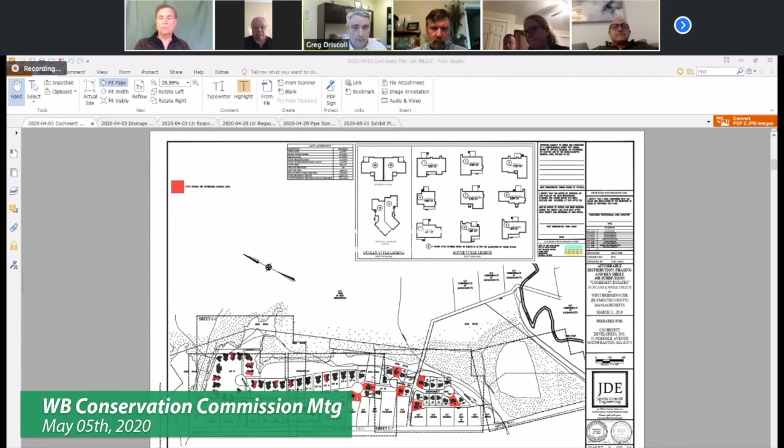I have. Yes, why don't you do that? Show the main plan, latest one. Oh, it looks like screen sharing is disabled, unfortunately. Okay, hold on for a second.

A few of the things that we had done was perform some soil testing along this area, back behind these houses on Scotland Street, actually behind all the houses on Scotland Street, because we did the other end as well, through here, and then also through here. So we got groundwater information on that, which confirmed and helped us revise the swales that go along the back of between the proposed homes and the existing homes, which is going to bring water into this basin over here.

That'll be a wet basin. So that's all designed per stormwater management, and everything checks out. This basin over here is also going to be a wet basin, so that'll provide treatment to the stormwater before it leaves the site, and also attenuate the flow. This basin out here is one that we introduced into the design to hit the groundwater infiltration requirement of stormwater management.

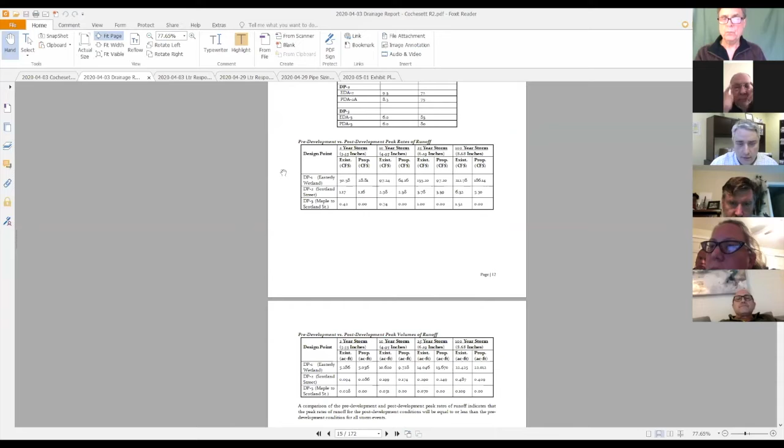This is the stormwater report, and what it really comes down to is these two tables right here. You can see from the 2-year storm, 10-year storm, 25 and 100-year storms, the peak rates of flow coming out of this project are reduced quite a bit. We're also reducing the volume of stormwater that comes off the site. That'll help with the flooding and other issues known to be a problem in this part of town. So I think that's about it.

All right, it's all yours, Tim.

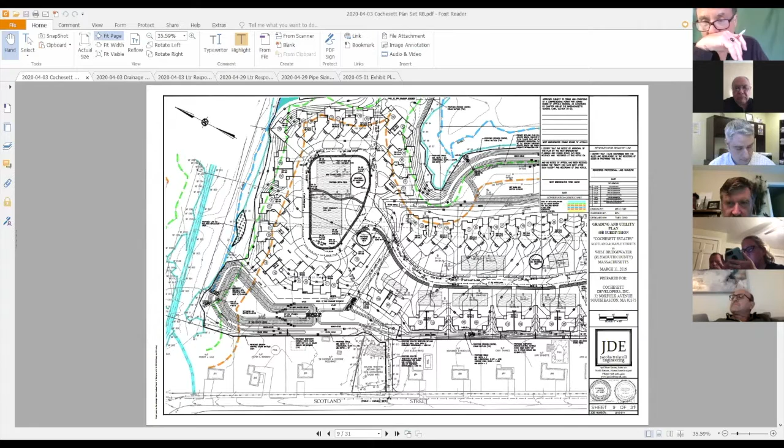Before I open it up for other questions, the compensatory storage area proposed for the replacement of having to go into the floodplain, that's all within the same flooded area, John? Yes, it appears to be.

I don't know if you can see my cursor, Greg? No, okay. On the plan you're sharing right now, the turquoise areas, yep, here, they don't appear to have any proposed grading changes. So how has that become a compensatory storage area?

Okay, that was a comment we received from the review engineer. This is what I'm calling the exhibit plan. We're hoping to catch these types of comments on a final plan set as a condition of approval, if the commission accepts that request.

So what we're showing here is a grade line right here at 62.3. That is the flood elevation, and we're showing callouts for the work to be done: grade this area down to elevation 62.3. Same in here. And this is a 62.3 contour just to connect it, because this right here is the floodplain line, 62.3 elevation. That blue dash line continues.

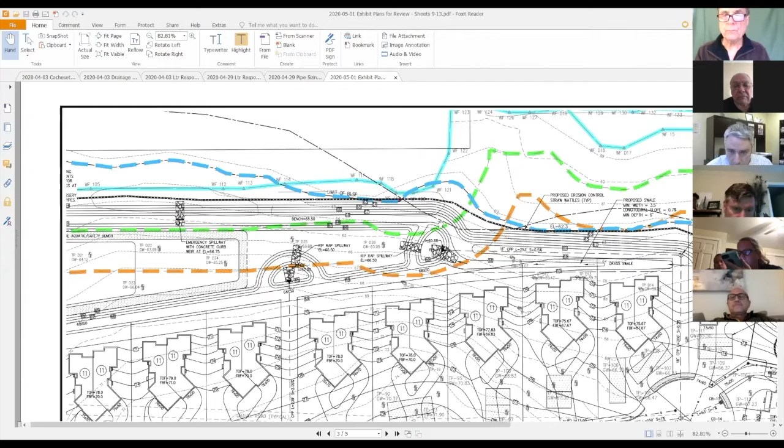So we grade that back to this area, and that back to that area, and other various places on the site that will provide the storage. We're getting more storage through here — it's a darker color. The way we're presenting that is the 62 elevation is coming back from this portion and being graded and dug out back to here, and then there's a little bit more 62.3 volume right behind it.

Okay, any of the other commissioners have any questions?

This is Mo, I have a couple of questions. One, just from a visual perspective, if I'm standing in the backyard of these abutters and looking at this project, I had a little difficulty determining what the average elevation change is between their backyards and the homes. It didn't look like much. Was that clear? Yeah, of the actual grading. Yeah.

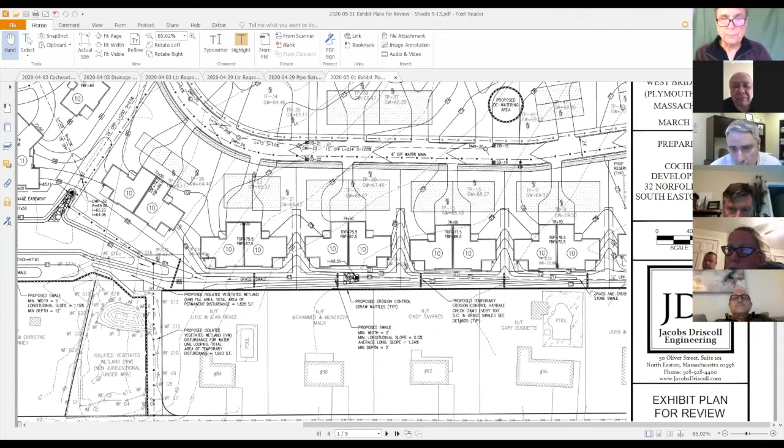So the proposed houses are coming up a bit because we want to keep the basements above the groundwater. Right here we have an elevation of 71, and this is coming up to 74.5, so it's about 3 feet right there. This is a 72 contour here, and it's coming up to 76. So it does have to come up a bit through here in order to keep the proposed houses above groundwater.

Okay. My next question — go ahead. Were you finished? Yeah, I was finished. If you don't mind, Mo, could I just have him expand a bit on your question? Sure. Greg, go back to that close-up of those houses that you just showed.

So by my scaling, these dwelling units indicated by the number 10 are 20 feet away from the back lot line, and everything behind the house is part of the swale, so there's really no backyard for these people at all. Is that correct? That's correct. And the swale is a drainage easement, so it can't be altered. Yep, is that correct? All right.

And then the swales in between those dwelling units with the number 10 designation, that's a drainage easement as well, is that correct? Yeah, right here. That was a request from the review engineer. All right, and along that swale is where I witnessed the perc tests, or test pits, to determine where the water tables were. For the most part, the bottom of the swale is either at the water table or just a little bit above, I'm sorry.

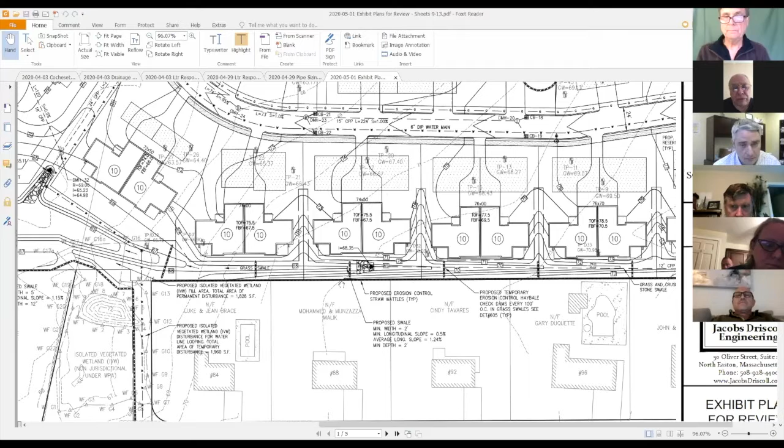Yes. If you would slide further north and do the same thing on that property, for the abutters there, take a look at the swale depth and the average elevation, that type of thing. All right, so we have a 66 through here, and it's getting raised up. It's pretty close through here, but then it goes up a little bit towards the back of these units, keeping them higher above groundwater and the basements.

This is probably the 67 contour through here. Yeah, it connects in right there. So across the swale is pretty close, pretty level. It looks like the top of the bench is about 67, 67 and a half—67.6 actually. So it's pretty flat through here, and then you'll see these houses further out.

And will the backyards be sloping to the swale? Yeah, these backyards currently naturally slope pretty much in this direction, so we'll pick up the water from their properties as it comes onto ours and direct it. From here down, we're directing it around our basin because we can't get it into the basin. It directs around and into the resource area through here.

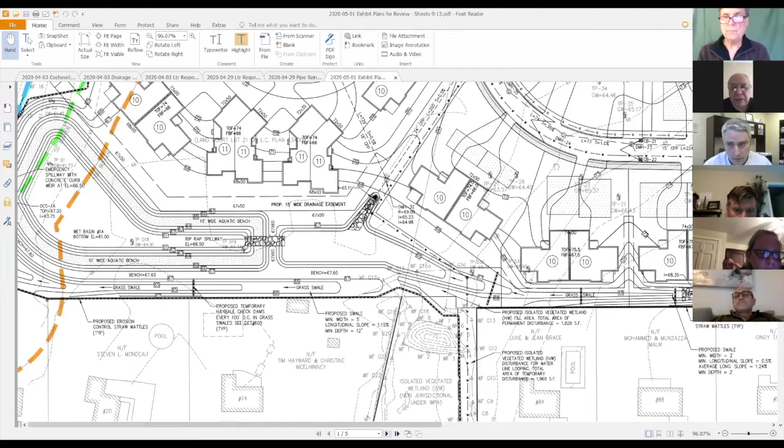And my last question, just for the public: the 53G engineer that we hired is an independent engineer to review these plans, and he concurred with your calculations. Is that right? Correct. Okay, that's all I had.

Do you want me to ask my questions? Yep, I was gonna say, John, what have you got? All right, I just want to see if we have any new people that I haven't let come in yet. Doesn't seem like anybody else wants to come in, so I think we're still good.

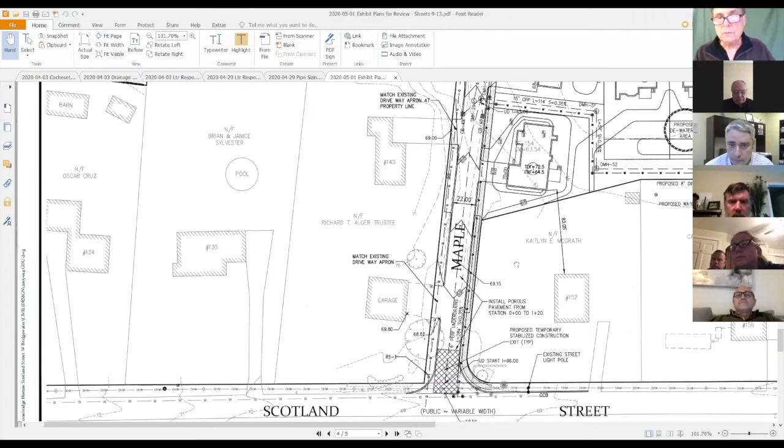All right, so the questions I have: on Maple Street, some of the abutters have asked about the alignment of the road and the width of the road. Yes, they did. So can you explain what is happening with a typical cross-section anywhere along that first part of Maple Street?

Sure. I believe it was Mrs. Pope, who lives at 140, that had asked us to narrow this road down on this side of the street. So that's why this is 22 feet wide right here, as opposed to 24 for the rest of the areas—we took 2 feet of pavement away from their side of the road.

What's occurring on the right-hand side of the road? Right through here, we have a sidewalk being installed. And we are putting in a section of pervious pavement right through here.

I don't know if it's not showing up, but from the high point of 69.15, down to here—that's the call out right here: install porous pavement section from these two stations, from 0 to 120 feet in. So the purpose of the pervious pavement is so that all the runoff from the high point heading out to where it connects into Scotland Street will be absorbed into the pavement, into the ground, picked up by this perforated under-drainage, and into the drainage system, and into this pond.

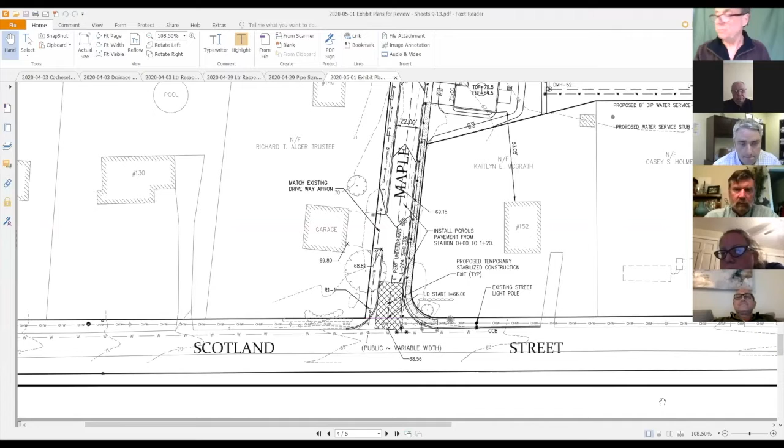Because the Conservation Commission owns the land to the east of this project, and Maple Street is an ancient public way on record, I think we would definitely want to clarify any and all claims against the use of that for the general public to access the conservation land. We're going to need an access easement and a right to travel over Maple Street to the boundary line of the conservation land, which is town land. Hopefully your client won't see any issue with that, but it's important to put to sleep any legal question that could come up, based on the fact that it could be an ancient road that's been prohibited from being used over a period of time, so the loss of access or whatever legal ramifications, we want to make sure that's put to bed right away.

I think Bishop. Okay, how do I take care of that? Let me find them.

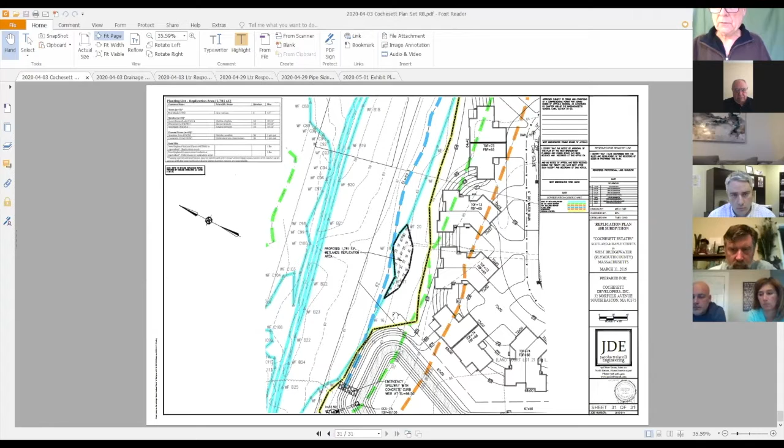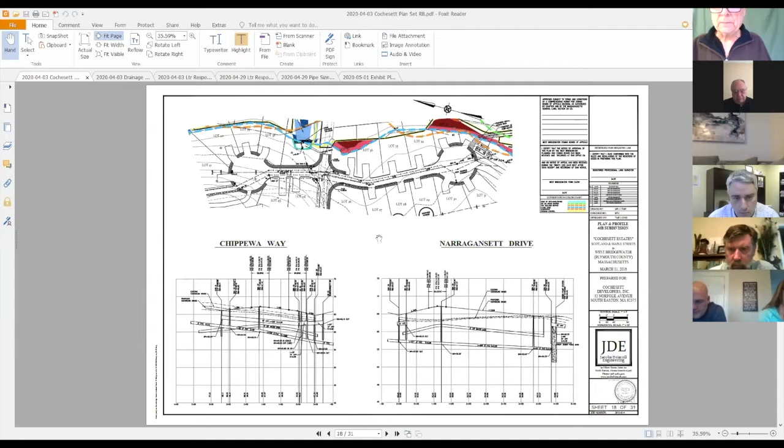On the plans, you had a security gate detail. Where is that located? I couldn't find the actual placement on the plans. Yeah, you just went by it on the detail. Perhaps the next sheet, there it is, up at the upper right-hand corner. Yeah, I'm not sure where that's supposed to be on the plan set.

So that's something that we need to look into. I'm wondering, I know there's a path over here, I don't know if that was where we're supposed to put it. But it's certainly not meant to close off Maple Street if that's any of the concern. Oh, I know what it is, this access road right here, this paved access road, I think it was meant for that.

Now, Bishop, is that something we want to keep gated off, or is that going to be free flow access? That was initially requested, I think we're leaving it up to the fire department, because the fire department requested it, so they have access, another access from Scotland Street. So we'll leave it up to the fire department. Okay, so that'll be determined later. Right, yeah.

So that's the general area you think it'll be. Yeah, definitely in here, connecting between the two cul-de-sacs. All right, next is, did you provide a profile and cross-section of the access road to the septic mound on the very southerly portion of the project?

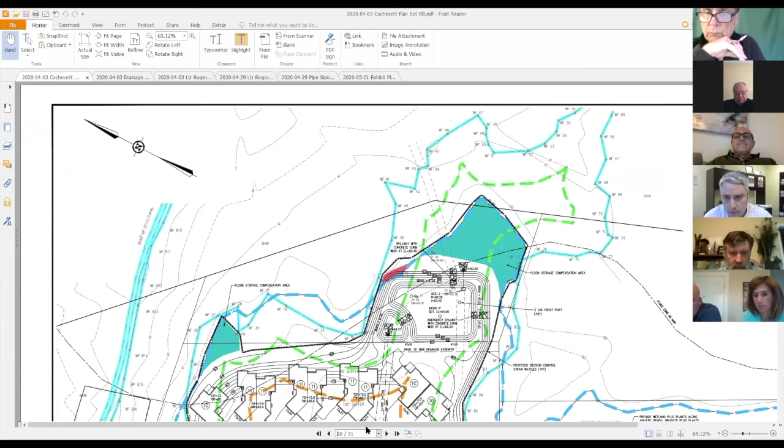If we don't, we can definitely add that. And while we're talking about that area, could you go to the plans that show that crossing? Sure. This one? That's it. All right.

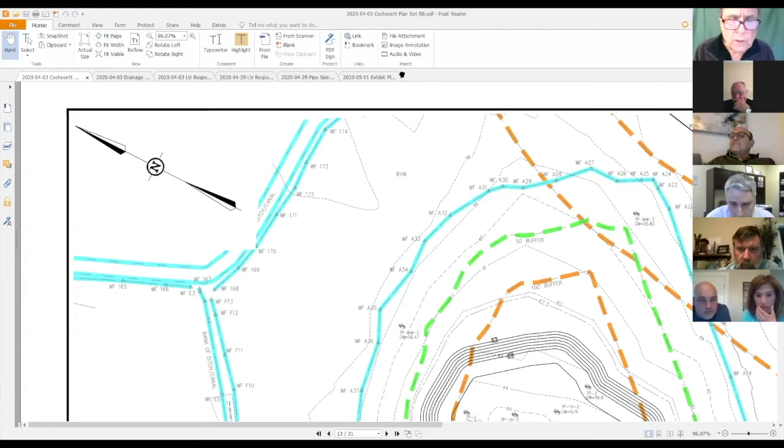So the question I have is the section of the access road going up onto the proposed graded area of the septic system is to a 1-to-3 slope. And if someone needs to get in there with a vehicle to do any inspections or maintenance of that area, those grades would have to change to be something of a little bit easier access grade for getting up there in all types of weather, whether it's icy, snowy, whatever it might be. The inspections, maintenance, or repairs that may have to be done could happen at any time of the year, so we have to look at the worst case scenario.

In addition, the section where you're crossing that you have crosshatched, that's in the floodplain. So if we had tremendous storms, or a number of storms in a row that brought the flood elevation up to where people in the area know it comes on an annual basis, that road would be flooded. And it's my opinion that there should be a raised section in there to keep from having to drive through floodwaters in case you have to access it. So that would require raising the grade and also putting in some type of culvert system to allow equal flow underneath the raised section.

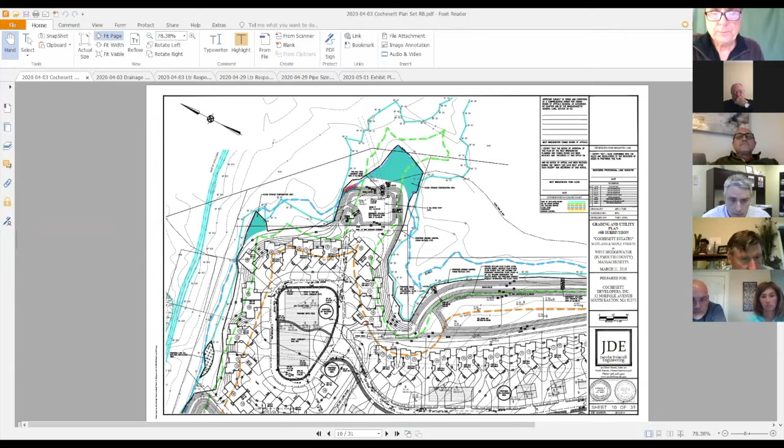Yeah, I believe Goddard put together a replication plan for that. If you don't have it, let me know, and I'll make sure we get the replication plan for the wetland replication over to you. But yeah, that'll all be described in that. And we can add some grades back in here, pull that grade back like it should be, and reference the replication requirements. Okay, sorry about that.

The construction of the turtle nesting area is not shown on these plans, and we haven't given permission to put the turtle nesting area in. I know it's been reviewed and talked about by the MESA program, Natural Heritage, but we need to see where that's going to go. So can you show us in general where that is on these plans? I know it's probably off the sheet, but I just want to give the commission members an idea of how far away from the construction site that is and why it should be part of this.

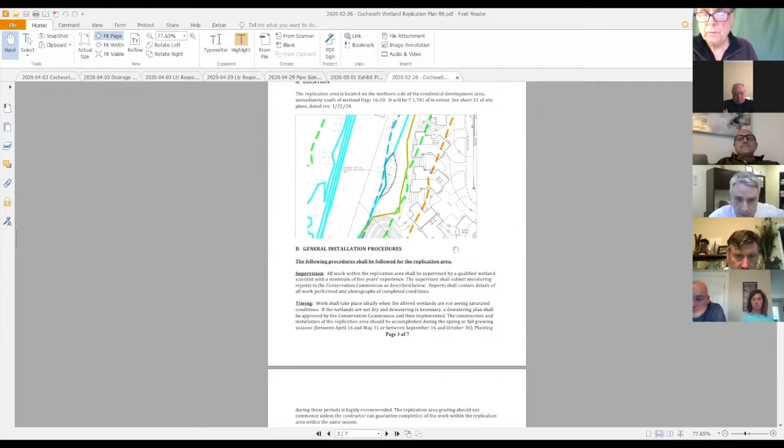If you like, we can add more grading in there to show that further, and maybe a reference for the contractor to make sure he has a copy of this report and is following all these instructions. Yes, we're going to make sure the contractor has it in a manner now that we've been asking, which includes being on the plan set rather than being a separate document. That's a good point, that the contractor needs to be able to install it.

And if he doesn't have all of the information, like the grades for how much to take out of the upland to make it a wetland, then there's no way for me to inspect it and hold the contractor accountable for it. So that's why it needs to be on there. Okay.

All right, so let's go to the swale area again, near Maple Street, or where Maple Street is. Actually, I think we skipped over the turtle. Oh, I'm sorry, yes, thanks for reminding me. Let's see if I have the turtle plan. That was also another document, report document.

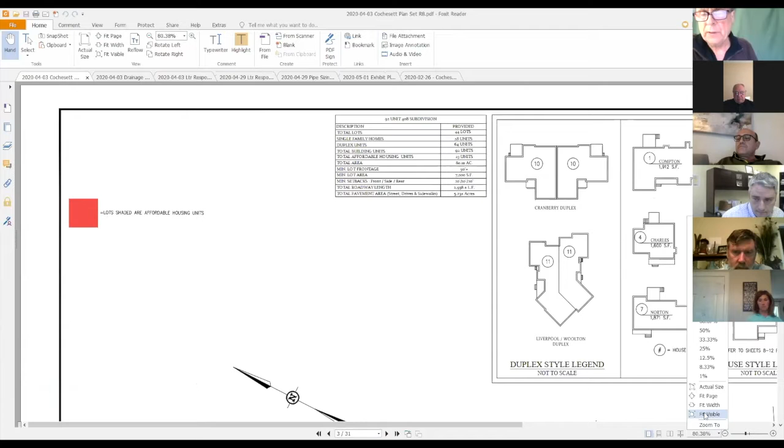While you're looking for it, one of the reasons why we're recommending these things be part of a plan set is that we've been finding out the contractors don't have all the documents that were submitted to the commission. And even if the contract says they are responsible for it, which the notes in the construction portion of your plan set puts that burden on them, we find they have no clue they even had it until it's too late, way beyond the time they should have put it in, and we're asking why it isn't in. So if it's on the plan set, we find they make sure they get it done. Fair enough.

Well, I'll see if I can put my hands on that. If you can just show with your cursor the general area where it's going to be, that's good enough for me. Part of the permission to build this project includes the construction of a turtle nesting site, and it's on conservation land, which was sold to or given to the conservation, however it was done. With that in mind, we need to grant some permission as part of the wetland regulations to have it constructed.

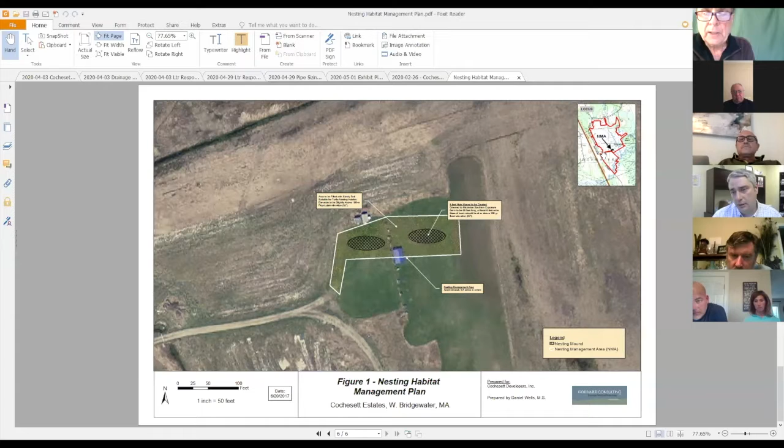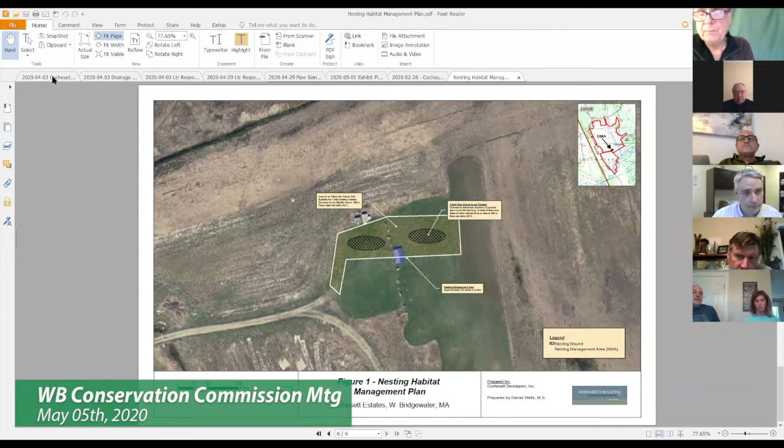So there you are. So if you can show the direction towards Scotland Street and the direction towards - oh, you've got the locus map. Yeah, so Scotland, Route 24, Scotland Street right here. Maple is where these lines converge. So to the left of that photo is towards Scotland Street. Yep, going that way, this is north, same orientation of north as this map. And on this overall plan, we're talking this area in here. Okay, that's good.

So now if you can go to the grading plans at the Maple Street section of the project. Right through here? Yeah, okay. So, can you give me an idea where the drainage water for the house opposite, on the opposite side of 140, will run? Not towards the street, but onto the abutting properties. These two properties? Yes, that one there.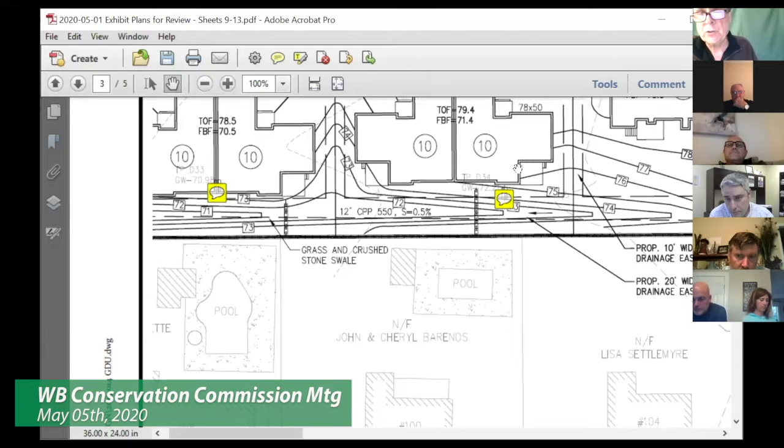And also there's been some questions about the groundwater done by other engineers on the site. And I don't know who did this one here where my cursor is, but you'll notice that the groundwater here is at 70.0, and I've got it at 72.2.

Naturally, the slope is higher here and it starts to go down. Whoa, I'm doing something here. It's going downhill this way, so that could explain why the groundwater table is a little lower in elevation. But I feel that it's pretty consistent when I try to interpolate from here to there.

So I just want to take some of the concern that the abutters have and indicate that they're pretty accurate with the interpolation of the water tables for where the septic systems are going to go.

The test pit D33, I have a groundwater elevation of 70.98, and that's at that box. And so 70.98 is pretty close to being 71. And so you can see the 71 in the swale here.

So again, it's right at or near the seasonal high groundwater table, which will take away some of the groundwater at the back of the Scotland Street lots and divert it into the drain system on the north side of the property. So I just wanted to point that one out to let the abutters know that we are trying to have the most accurate information, number one, but number two, it would alleviate some of the groundwater issues in that area.

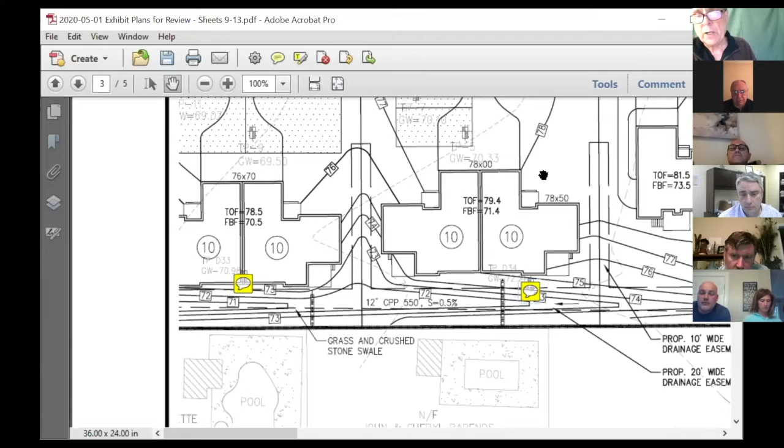Again, it's in a drainage easement, so these people aren't going to be able to fill these in, legally fill them in and stop the water from flowing. And so that's why it's in a drainage easement. They might be able to put a deck over it if the building inspector allows it, but they can't fill it in.

All right, another thing I'm going to share is the consultant's report, if I can find it. Oh, before I do that, I'll just share with the abutters and the commission that these were the test pits that I witnessed on that day.

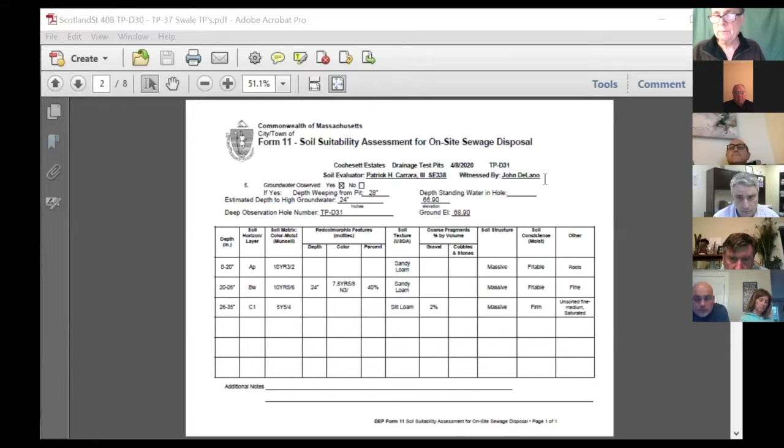So you can see, is it showing? Yep. All right, that I was there and I personally witnessed it.

So this is the final review letter that came out from the consultant for the commission. It's their third and final peer review letter.

What happened to it? Is it still there? It's showing, I see it. All right, it doesn't show up on mine. Hold on for a second. I don't know why. There we go, what is happening here? It'd be good if I knew how to use this.

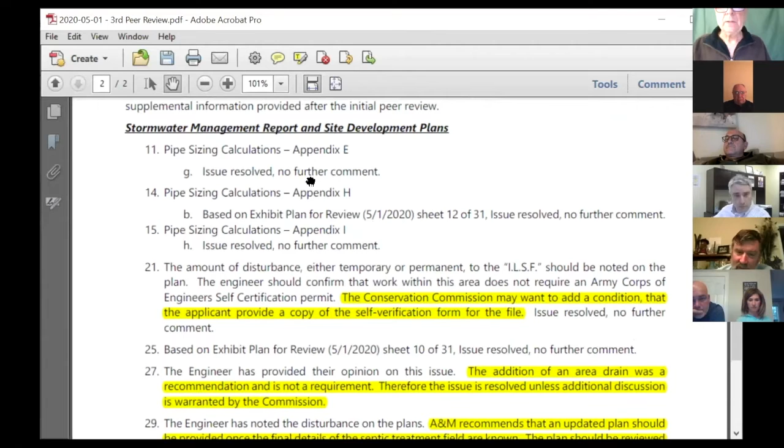So they go through the letter saying what they reviewed. They reviewed these following documents, and it's all things that were submitted. And these were their final comments that they wanted to address, and you can see that they have no further comments and so forth, but they did have some things that they wanted to point out, and I highlighted them.

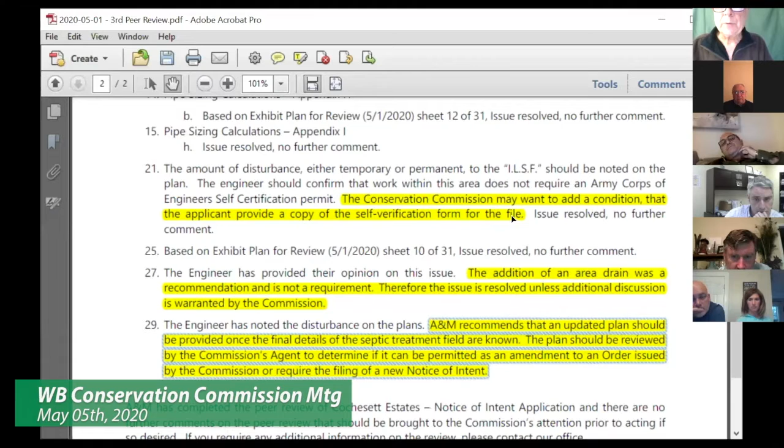The first one is the Conservation Commission may want to add a condition that the applicant provide a copy of the self-verification form for the file for the filling in of the floodplain, or I'm sorry, the ILSF.

Next one is the addition of the area drain was recommended and is not a requirement. And that was in the area that I was honing in on, where there weren't any swales that would divert the water away. They had recommended it, but they realized that it's not a requirement. And the commission may still want to have that, so we'll have to discuss that a little bit more.

And then finally, Allen and Major recommends that an updated plan should be provided once the final details of the septic treatment fields are known. The plan should be reviewed by the commission's agent to determine if it can be permitted as an amendment, or does it require the filing of a new notice of intent. So we'll need to be looking at those septic plans once they get submitted and see if they have any effect on the approval of the commission, if the commission does approve it.

So that's all I have at this point. Tim, if you want to open it back up to questions of the commission or to the abutters.

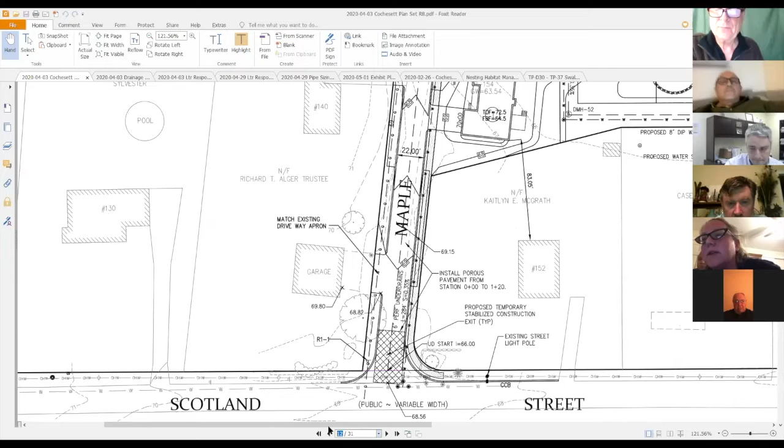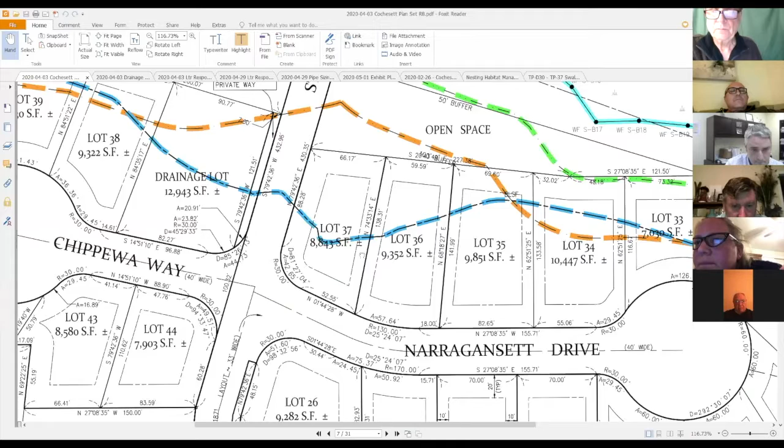So that's 28, we're at 26 because... right, so we still... and so that to me says you have 7 feet left over. Does that match up with your 7-foot private way or whatever you stated? Do you see what I'm trying to say? It's a 7-foot wide private way.

Existing 33 feet wide, yep. Do you have a cross section of that section of the roadway, Greg? I don't know if it's particularly that section, but I can see if I can find it.

Because it just looks like that road is going to be right on, the edge of the road is going to be right on our property line. And that you're going to have 7 feet of that 33-foot right of way on the opposite side, where actually the road currently is. It's like you're shifting the road 7 feet to the left.

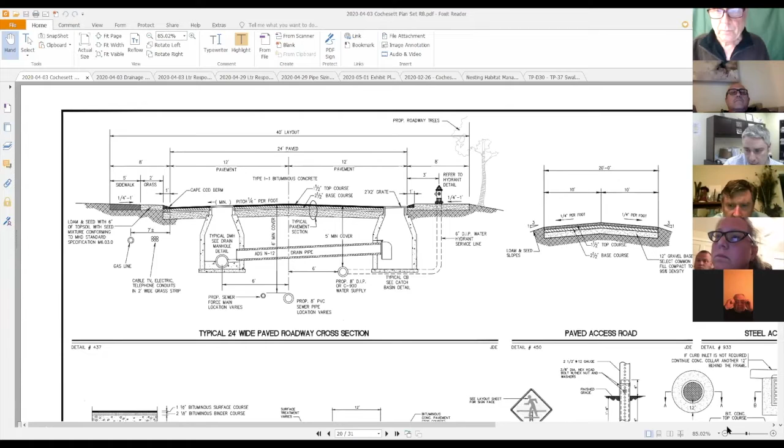That's a typical section. I don't know if we have a separate one for Maple. It might be a good add-on to the plan for the contractor to know exactly where to put things in that section.

Because again, we need to be able to evaluate the potential damage to our current trees. I understand you guys probably hate that we keep bringing up our trees, but they're a huge benefit for shade and for cooling our house. They're very big, mature trees that can't be easily replaced.

And so if there's 7 feet of unused green on the right side of the 33-foot easement where the road currently is, we're just a little confused on why you would shift it left. That's all.

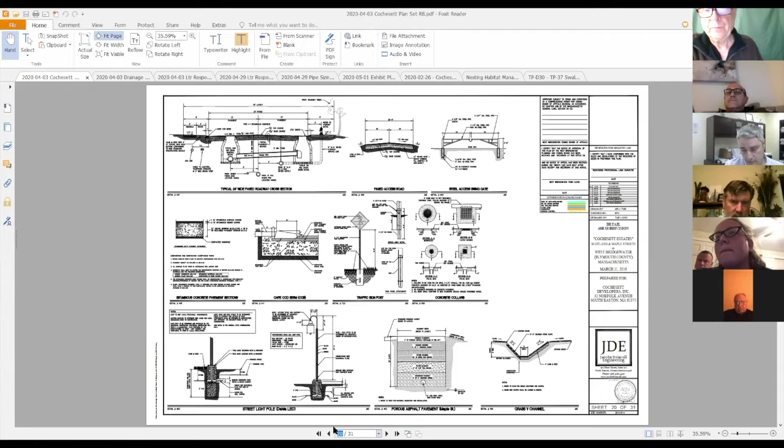Well, it's until we took the 2 feet away on your side, it was centered between the existing right of way and the 7-foot strip. Typically you put a road on the center line of the paved area to match up with the center line of the right of way. And we took that 2 feet away along the side here.

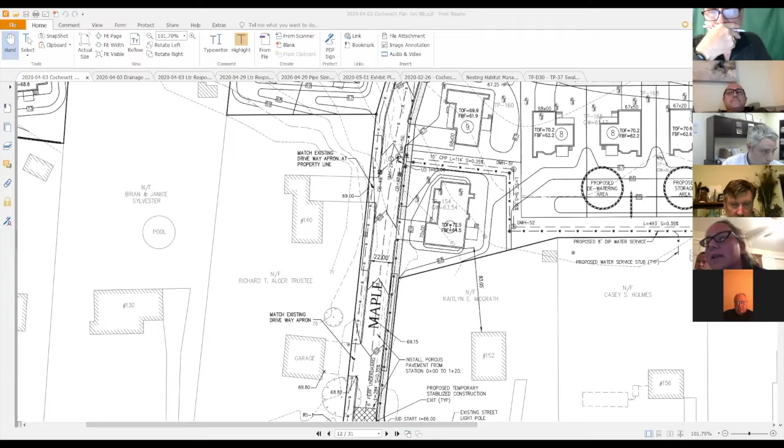I would disagree with that assessment, based on us getting our property surveyed. We measured from the marker for the 33-foot easement. If you came out to our yard, you'd see that the 7 feet on the far right side of that 33-foot easement is all dirt road currently. So that's why we're a little confused.

Having that cross-section, Greg, would probably provide Jamie with the data she needs to evaluate that. Okay, yeah, and you can see this dash line is the edge of the existing road, and over here...

So it looks like we're paving. Is there a highlighter that you can use? Because you may show it on the plans, but in reality, I don't know how clear it is out there, but we can take pictures and show you.

I'm sorry, what are you saying Jamie, that the distance from your property line... So we're asking—it's hard because I can't point to it here, Bishop—but you can see where it says match existing driveway apron? And see right around that line where it says CB 49?

Sorry, if you could move up a little bit. Can you move it down? Yeah. So CB 49, that's where our driveway ends currently. Do you see what I'm saying?

I do. And so we're, which is over our property line, right, to match the current dirt road? To match the current dirt road. The dirt road is this dotted line.

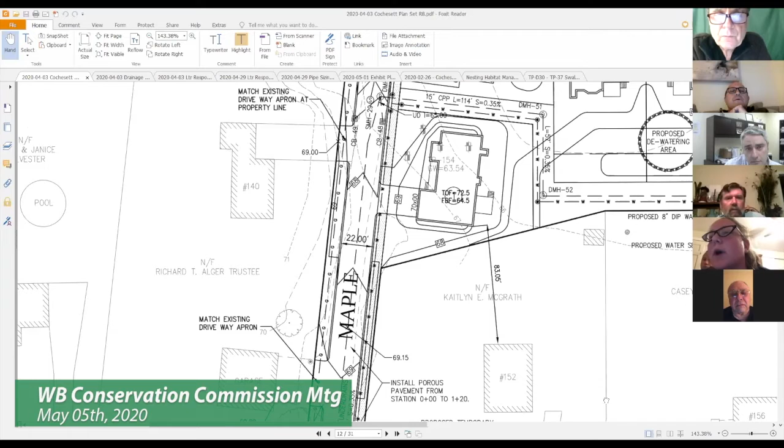Yeah, if you go to the edge of our property—sorry, so if I can just go to the edge of, yes, there you go. So see where the edge of our property is, to like where that little—right across from it where you have that little berm or whatever going into the driveway.

Right here, yeah. So we had measured that across for 33 feet, and we're just trying to figure out the distance between our property line and where the actual asphalt is going to be. Because it looked like the road had shifted onto where we have grass, close to the trees on our property line—because you don't have our trees in front of our house on this map.

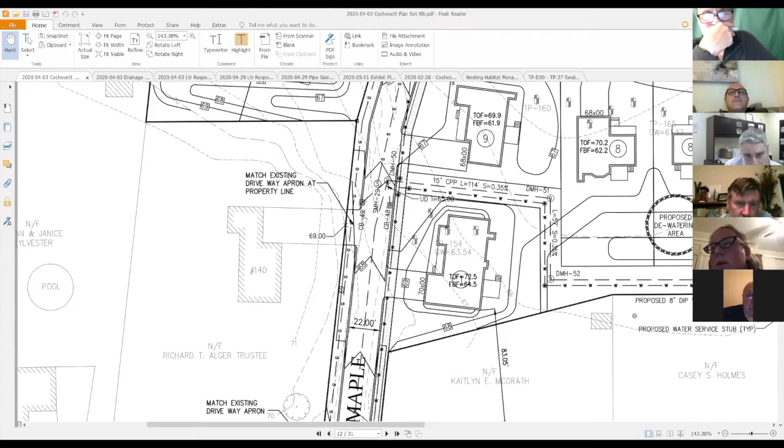Yeah, so this is part of the road, the edge of the existing gravel road. So this would take away grass, since that's just grass right now. Yes, it's all grass. That's why we're trying to figure out how close to the trees you're going to be digging.

But Jamie, you seem to imply there's a discrepancy between the plan and reality. Can you explain? So if you're looking at this corner where the driveway is, where there's the metal stake they used for our property marker, there's a property marker there.

Originally, on the original plans, your asphalt road went all the way up to our property line, and it would have shifted the road to the left. So we're trying to figure out how many feet are between our property line and where the asphalt starts. It looks like 7 feet, but we'll get you a cross section to be more specific. I just opened my CAD software and measured it at 9 feet from the property line to the edge of the back of the berm.

The berm is shown in this one, all the way down. Does that 9 feet distance go all the way down their property? I'll check a couple of spots right now, because really I'm most worried about the trees.

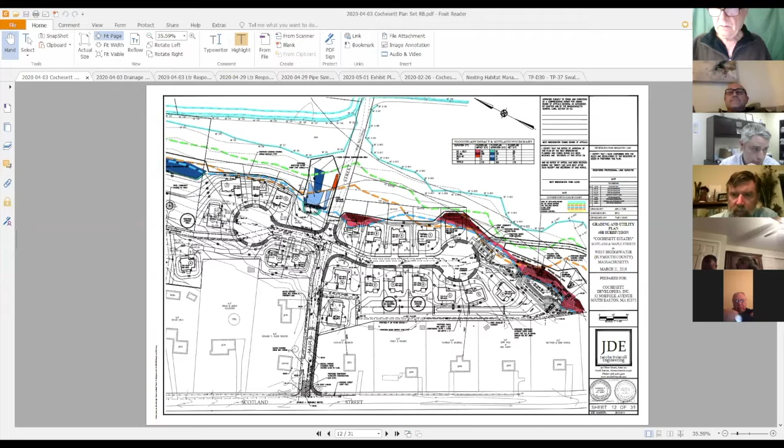Hi, guys. So can we go to 158 Scotland Street and look back behind them? And I want to know if that land is going to be elevated. And I'm really curious to know how many bathrooms are going to be in those huge houses.

Did you get that, Greg? Drainage. I didn't get the number. 152? 158? Oh, 158, okay. All right, share again. Okay.

So it looks like we got 149 feet from your house to the closest house right here. And let's see the grades, once we're at 66 coming through here. And that's a 66 proposed right here, 67. So those houses aren't going to be that much higher than your yard, maybe a foot. The foundation's going to be a little bit higher, but that's what the grade around it's going to be. So I looked at it, and it looks like it's 2,700 square feet.

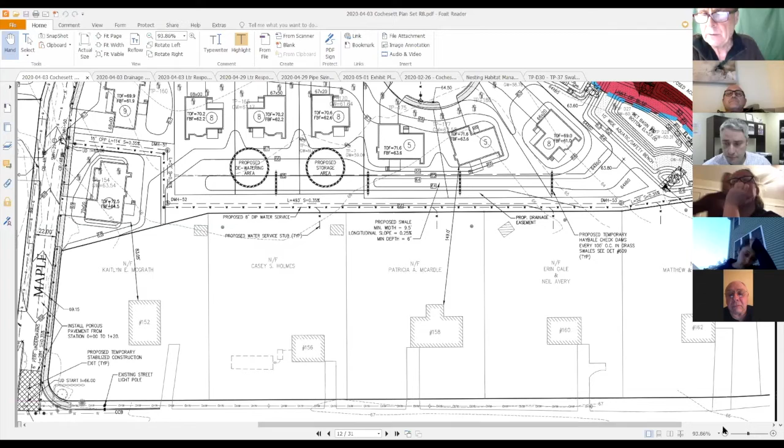2 baths, okay. And all of those units in that section, you could probably refer to one of your other drawings, are all going over to the septic mound out in the south part of the property. So there's no septic systems in this area, is that correct? Correct.

Okay. All right, so then, I noticed that there is a lot of landscape in front of the houses. What about, is there going to be any privacy for us? I know I've brought this up a few times, a fence, bushes, anything, or am I going to be looking at this huge house right behind my house? No, there is no privacy. Okay.

All right, and you are bringing in water that can be made available for all of those houses in the future? That is correct. This is the water line right here. Oh, you're bringing water to those houses, or what about ours? But this line back here is for your houses, see, look at it. Proposed water service stub right here, one right here. Oh, wow. Thank you, Bishop.

What changed your mind? Actually, nothing changed my mind, that's always been the plan from day one. No, it wasn't. We got in a huge fight about this last time, you said you weren't going to. Well, okay, so thank you. Let's not get in a fight this time. All right, I'm not a fighter, I'm a lover. All right.

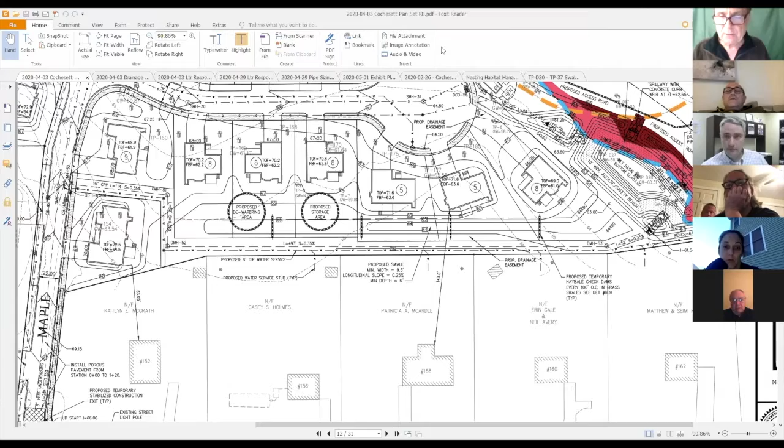Hi, hello. We've talked a lot about the drainage in the backyards, but now I have another concern about the drainage in the front yards. We talked about putting Cape Cod berms in front of the McGrath property to push the water our way. We have no drainage in our front yards right now, and when it rains, the water basically pools in all of our front yards. I think this is going to aggravate our problem even more. Is there any thought about drainage in the front for us?

So what we're doing with Maple Street is making this impervious pavement pervious, where the pavement's pretty much like a sponge. That's reducing the amount of water coming from this property out to Scotland Street. And then, you know, this is just— oh sorry, I'm not even sharing. I'm doing a show for myself here. Okay, hold on.

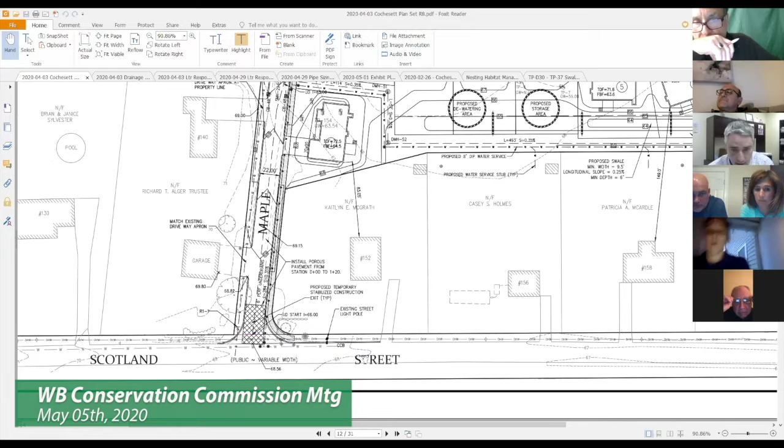So this section of Maple Street, the way it currently goes, it looks like it goes onto the McGrath property as overland flow. By putting the berm in here and making this pervious pavement, which acts kind of like a sponge, it's going to take a lot of water off of not only the McGrath property, but also off of what's going on in Scotland Street currently. We put this berm in here before we came up with the pervious pavement solution, to also keep water moving along. But since we're taking care of what's happening on our property, what's hitting Scotland Street currently isn't going to change other than what we can control and not put onto Scotland Street.

They're putting water— he's adding stubs. He's putting water stubs right in the backyard, so we can just connect the water. We don't have to connect it from the street down. It won't cost that much money. So as far as what's going on—

Who's unmuted here? Patricia, I believe. Because you weren't leaving me alone.

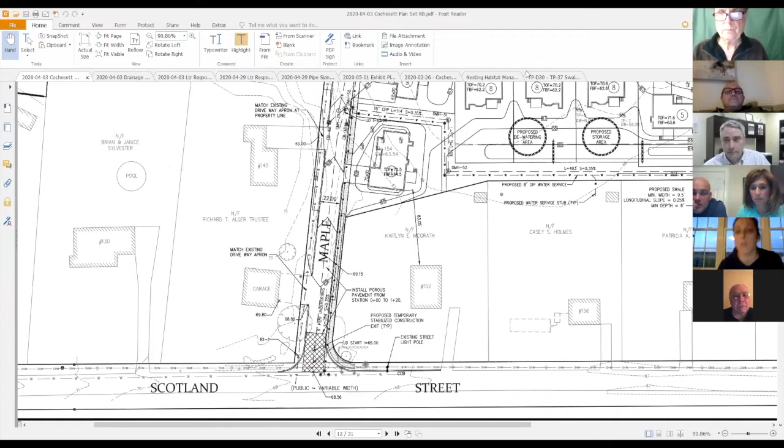As for the front here, everything that falls on Scotland Street, we don't own it. We're not making any changes to what's going on out front here—that's all your property. We can't just go in and start changing things. But what we're doing is reducing what we can, which is from Maple Street, actually Town Road, and keeping that water off of Scotland. So it might help a little bit, but I don't think it's going to totally solve your issue on the front yards. It's a very flat road through here, and it's not until it gets past your house that it really goes down and into the wetland area.

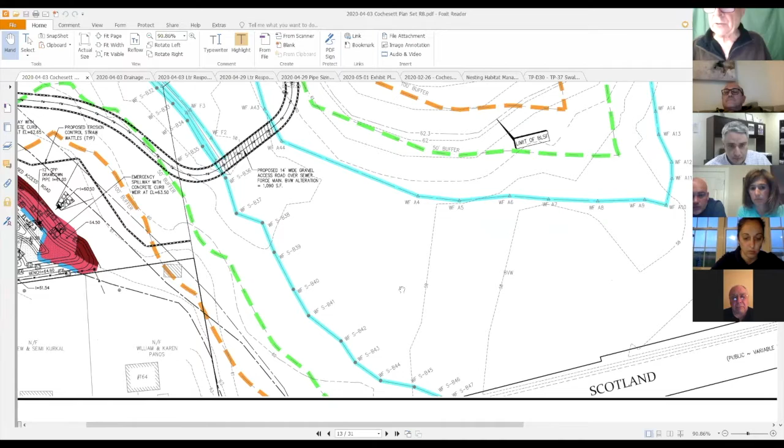So correct me if I'm wrong, isn't there a country swale along the edge of Scotland Street that the town uses for drainage? On this side? Yeah, in that area where you're showing those contours.

Yeah, we get road contours through here. I'm pretty sure there's a country swale along the side of a lot of those houses in that area, right in here. But that's something we can take a look at. There is something there, but nobody keeps up with it—it's overgrown with weeds, water doesn't get through, it just sits and pools. Our builder actually came back to try to help alleviate our situation and put drainage in, but it still just pools there.

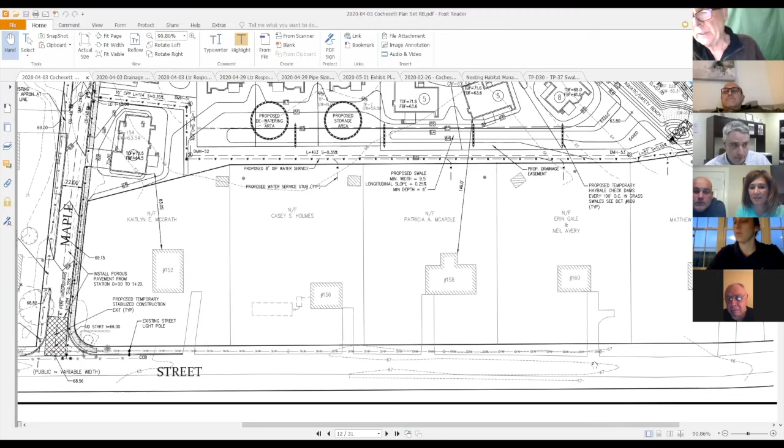Yeah, if it's in the town layout, the highway department has to maintain it. They don't like to hear that, but as the stormwater management plan for the towns develops a little more leg to it, they'll have to do their own maintenance on them.

All right, I have another issue. I'm extremely concerned about the water. As you know, you've heard this over and over again. I'm the last house, I'm in a flood zone, and we have water issues. I feel like all of the water is being pushed this way from the development. We're going to have the leaching field behind us, and I know this is not your problem, but we also have that big massive building in Bridgewater now, which seems to be changing the water around here. I am extremely concerned that my house is going to be on an island, surrounded by water.

I know you're putting in the swales, which is going to help alleviate the water in our yard, and I hope, honest to God, that takes care of our problem or helps alleviate it. If it does not, and I have severe water issues after this project is in, construction's done, houses are occupied, and everybody walks away, and I have water issues, who's on the hook for that? Right now we have corrected our problems and we haven't had an issue since, but I'm extremely concerned about the amount of water that's being pushed towards my property. I want to know who's going to help me out if I have an issue. Is it the town? Is it the state? Is it Mr. Hashim? Who's going to help me?

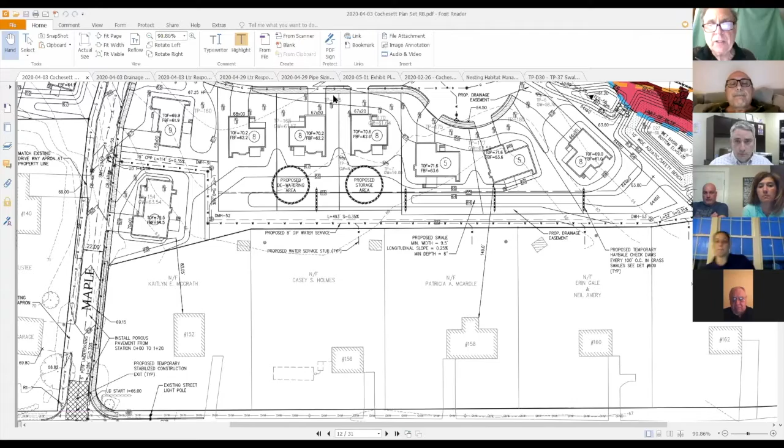Brian Sylvester also asked if we could show on the overall phase mapping which dwelling units go to the common septic system to the south, the shared systems in the middle section, and the common system on the north side. So, all these properties here, including this one and the two off the sheet on that cul-de-sac, behind Scotland Street 124.

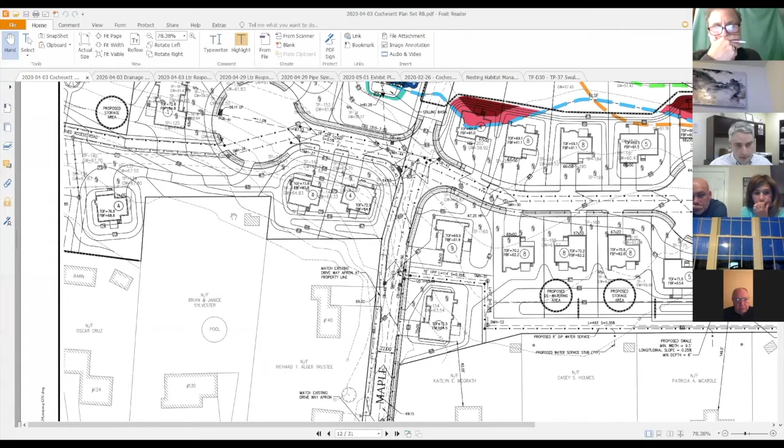There's a sewer line here into an easement, running all along here. Each of these houses would connect in with service lines up to there, into the tank system and pumps, and up to the knoll. These last two houses connect into that same line. All these are the septic systems, primary reserves.

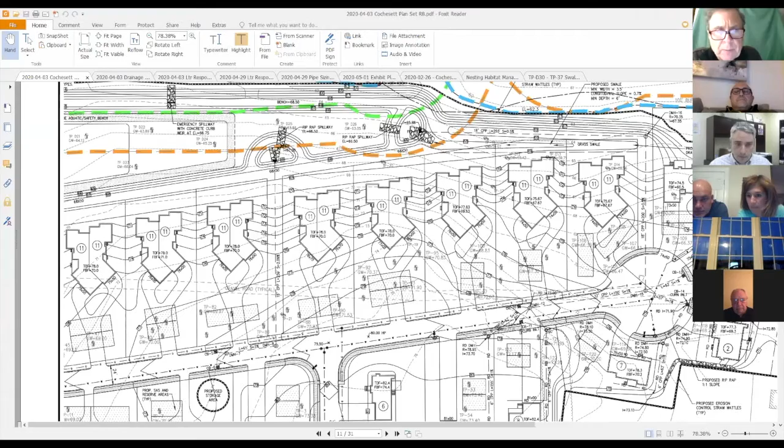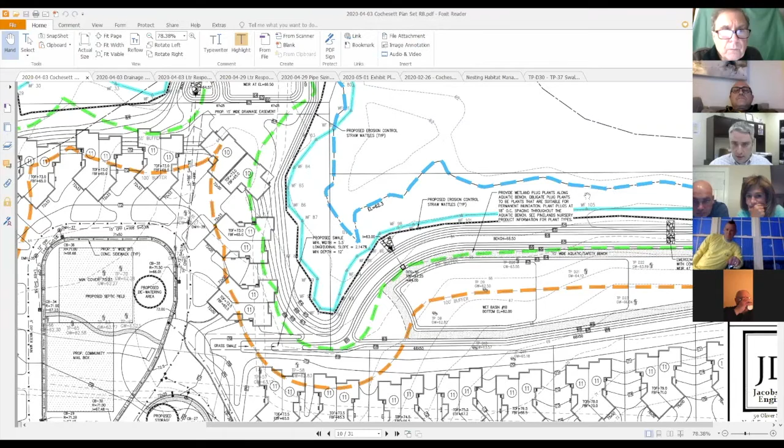We have test pits for these areas and the primary reserve septic areas laid out. These are all individual systems, from Millbury all the way down to approximately 84 Scotland Street, where the water loop is going to go. Then starting with these two, and around here, all these are going to go to this system in here.

While you're there, Greg, the groundwater elevation looks like 62.3 on one of those test pits. Let's just say 62.5. And the existing ground elevation is 65? Yep, there's a 65 going right through here. It's probably a 64, I'd say, right there. So it's between 2 and 3 feet, the water table. Correct, and this area over here is a bit higher, around 66.

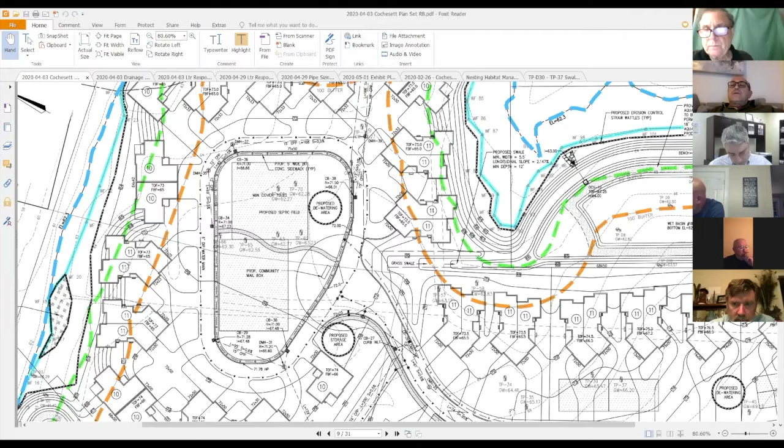The question came up: does the Board of Health have the certified soil evaluator's reports in their office right now? I honestly don't know, but I'll make sure they get them, with all the soil logs and forms filled out. Everybody has records, but the formal forms will be filed with the Board of Health. All the ones witnessed for the septic testing had the health agent present, correct, Fisher?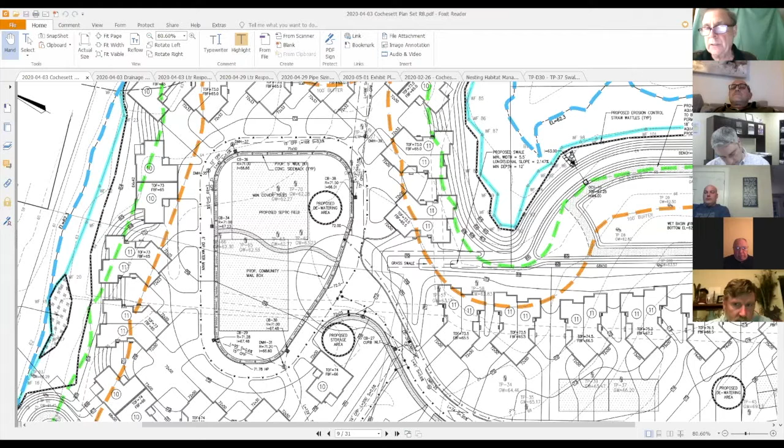Correct. According to DEP regulations, there's a time frame for those official forms to be turned into the Board of Health, because the agent's copy isn't the official one — it's the certified soil evaluator's copy that's official, and that's what abutters need to review. We'll make sure they get them. I've heard the Board of Health doesn't have them yet, though I haven't confirmed it myself — I'll make sure they do. Any other questions?

If anybody raise their hand in the chat? Aha, Jamie again, I'll unmute you. Looks like Kaitlyn McGrath also has her hand up.

Just one question. Are we going to see revisions to the plans before you do a final vote for approval, with the proposed drainage? I just want to understand next steps. The commission will have to come up with some of their own concerns and have the design engineer address them. You heard some of mine, and the commission will have theirs as well. Yes, the final plans will have to be revised, and everybody will have a chance to see them.

All right, Kaitlyn. Yeah, I believe John mentioned this earlier. With the house that's going to be behind 152 Scotland, the drainage is taken care of in the front and back of that house. So my concern is what's going to come onto our property from that new house to the east.

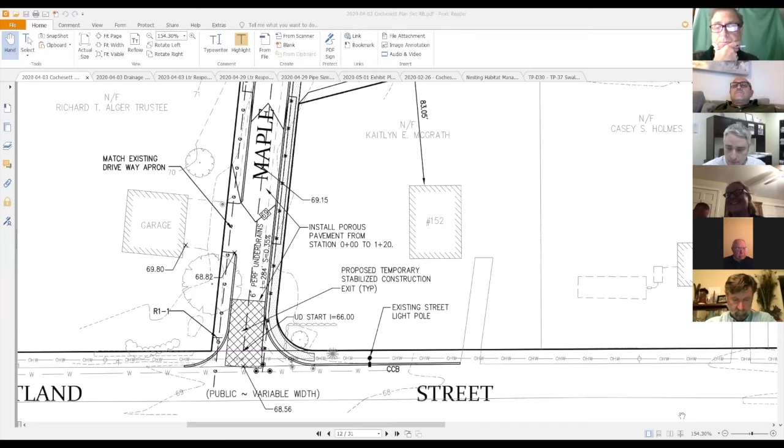Any other hands? Is that you, Jamie? No? Okay. It's all yours, Tim.

Any other questions? If hearing none, I'll entertain a motion to continue. Do we want to go to the May 19th or June 2nd meeting?

Greg, I assume Bishop would want to go for May 19th. That's correct. There are a few comments we can take care of pretty quickly. The governor has extended it to at least the 18th, and we meet on the 19th. The next meeting after that is June 2nd.

It might be possible that instead of doing this remotely, we could do it inside a meeting room, as long as we maintain whatever requirements are required of us, and do it safely, so everybody has a chance to see the plans and ask last minute questions. Just a thought. The problem with that, John, is we will not know whether we are able to do that until the 18th, the day before. In case he extends it further, it may be problematic.

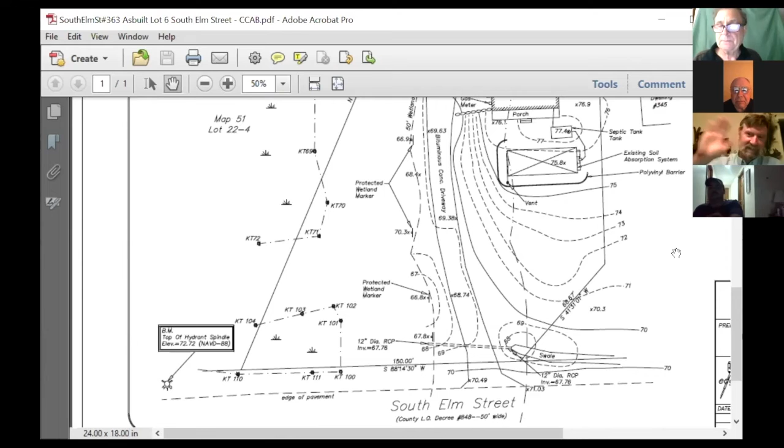So I don't see that as an issue either. I'm recommending approval of the certificate of compliance and hold the bond until he puts some riprap on the entrance part of that swale in this area. And if you'd like, I can show you where it is on South Elm Street, maybe a locus.

Tim's muted. Thanks. Tim's muted again? Yes. Yep. All right. Boy, how does that happen, Tim? He's still muted. There he goes.

John, my only question on those lots, and maybe I just can't see them, but I haven't seen the wetland markers. On that one particularly, the wetland markers are in. I did check that, and I got pictures of them. So they are in, and they show on the plan. Okay, I knew they were on the plan, I just wasn't sure whether they were really there, but if you've checked it and they're there, then I don't have a problem.

Anybody else? I'll entertain a motion to issue a certificate of compliance without a bond. I'll make the motion. I'll second it. Moved and seconded, all those in favor? Aye, so moved. Was that without a bond? Yes. And what I'll do is hold on to the certificate and not give it to them until I see the riprap in.

Maple Street. We have a letter into the commission where they're going to put the Bertarelli parcel on Maple Street out of 61A.

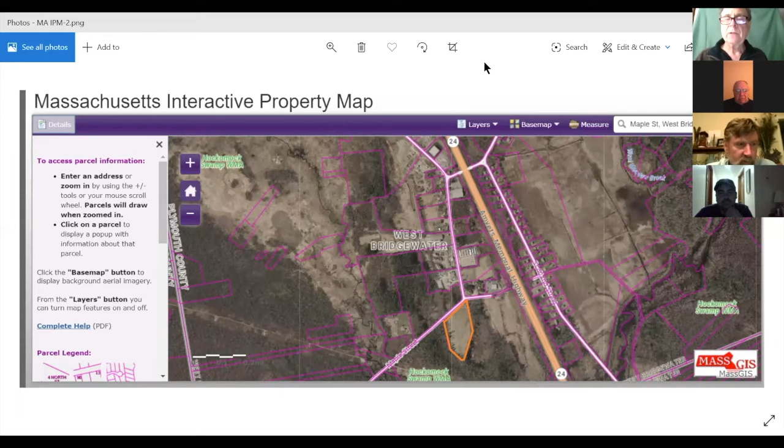So it would be wonderful, since all around that land is fish and game and it's all protected around it, to purchase it, but it's over $1 million, and I don't think we can afford that, or the town can, especially now with the way things are. So unfortunately, with sadness, I would recommend that we not ask the town to exercise their first right of refusal.

How big is the parcel, John, roughly? Let's see if I can figure that out. Well, you don't have to go to too much trouble. So by memory, it's like 10 or 15 acres of land. All right, that's a commercial area though, isn't it? Pretty much, I think it is industrial, even though it's in the Hockomock Swamp ACEC. Okay, too bad the state fish and game didn't have a little extra money to throw at it.

Yeah, yeah, they would throw 50 cents on the dollar.

All right, I'll entertain a motion not to exercise our right. I'll make the motion. I'll second it. Moved and seconded, all those in favor? Aye, so moved.

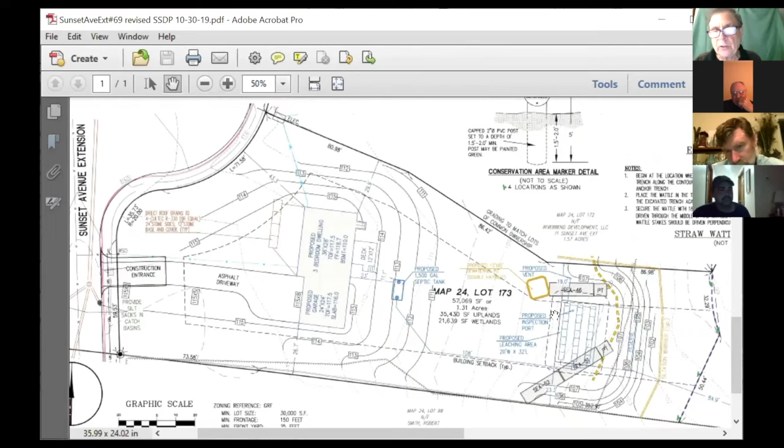I'm going to switch over to this is the one that they're now proposing. And what they've done is they've made it a 4-bedroom house, same location, same grading and everything, except now they have 4 septic lines instead of 3 to compensate for the additional bedroom. They've moved it back a little bit, so instead of putting the line here, they added it here, so they're farther away from the wetlands. Here's the conservation easement, and it's at the 50-foot buffer, so it's more than 50 feet away from the wetlands, and I don't see any impact, so I would recommend for number 69 to be a minor project change.

All right, I don't have any questions. No. All right, hearing none, then I'll entertain a motion to call it a minor project change. I'll make the motion. I'll second it. Moved and seconded, all those in favor? Aye, so moved.

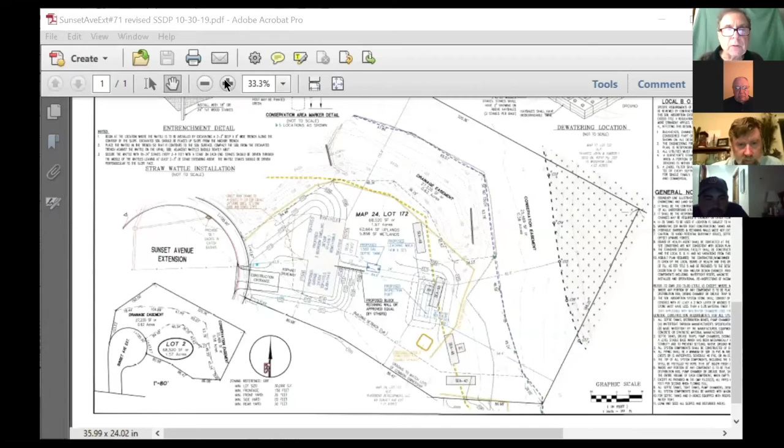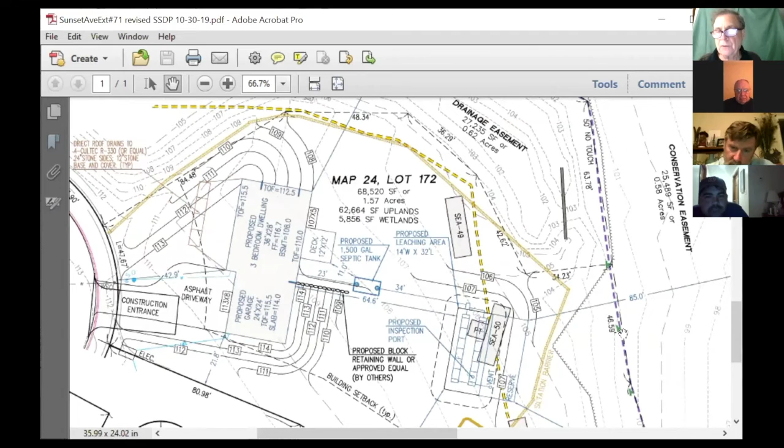All right, and then for 71, John? 71. The first slide is what they originally proposed. So a 3-bedroom house with the septic system, again more than 50 feet away. This is the conservation easement along the 50-foot buffer line. And what they are now proposing is a 4-bedroom house.

So now it's 4 bedrooms. Whoop, I gave you 69, sorry, hold on. Looks familiar.

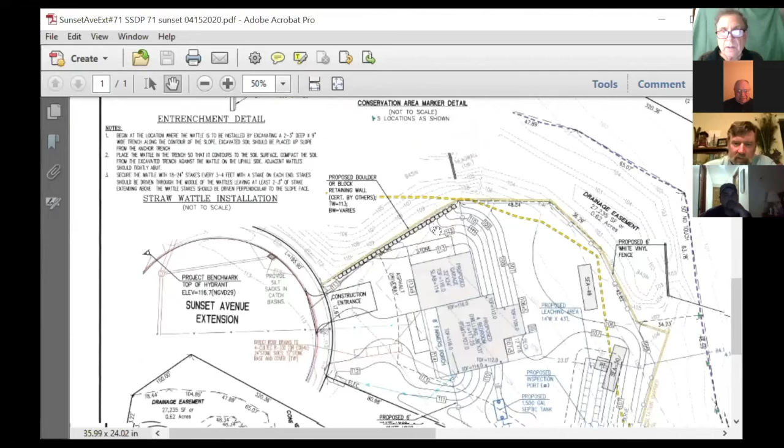So now it's a 4-bedroom house. The house is a little bit different, primarily the same footprint, and I'll flip back if you'd like me to, but the system is a little bit larger now to accommodate the extra bedroom. It's again more than, here's the conservation easements, well over the 50 feet away. And I really don't see any impact. Even though the house shape is a little different, it's about the same footprint. So I'd recommend approving it as a minor change.

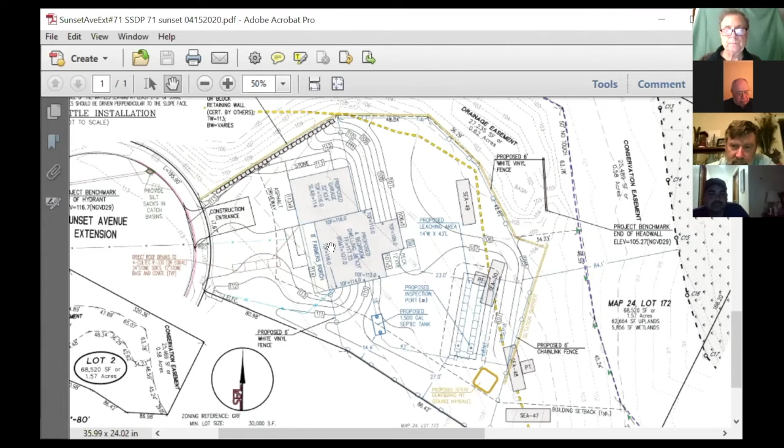All right, any questions? Hearing none, then I'll entertain a motion to call it a minor project change to 71 Sunset. I'll make the motion. Second. Moved and seconded, all those in favor? Aye. So moved.

Okay, then last on the agenda is an invoice that we can put in for the subscription to the Zoom meeting platform. And if everybody was fairly well pleased with it, it should be easily approved. But if you didn't like what we were doing, you might not want to approve it.

So here it is. It's for 1 month, it's $14.99. With tax, it comes out to be $15.93. And we can unsubscribe at any point down the road when we find it's necessary to do so, so we're not locked into a year's contract. There is a savings if you do, but I don't see the point in it if we're not going to need it for a lot of months. So we may need it for a couple of months, but not for the whole year.

How many people can we put on that one? 100. Oh, wow. We had one person tonight we didn't see, the one lady. Is that because she only came in by phone? Yes, you can sign up by phone or computer, and she probably elected to go by phone.